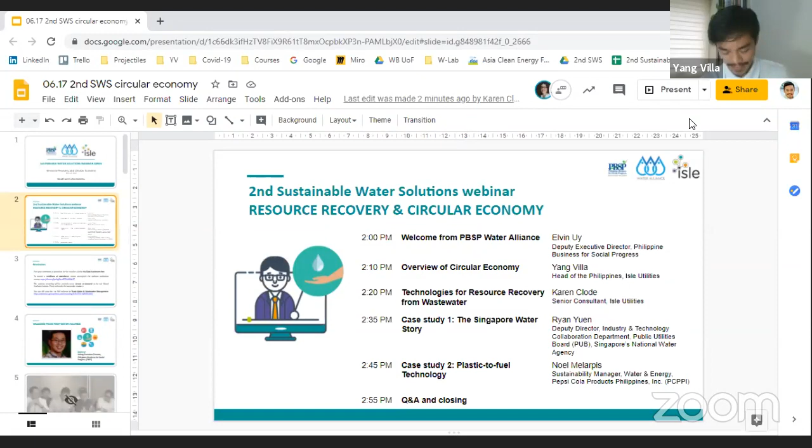Very good. And we've got a lineup of very knowledgeable speakers about this subject. And our agenda for this afternoon is, first we'll hear from one of our partners in delivering this webinar series from PBSP Water Alliance. And then I will be talking about an overview of the circular economy and resource recovery. And then we'll hear from Karen on the technology solutions for making these happen. And then we have two exciting case studies, one from Singapore and one from the Philippines, on resource recovery and circular economy. And finally, we'll have Q&A and closing.

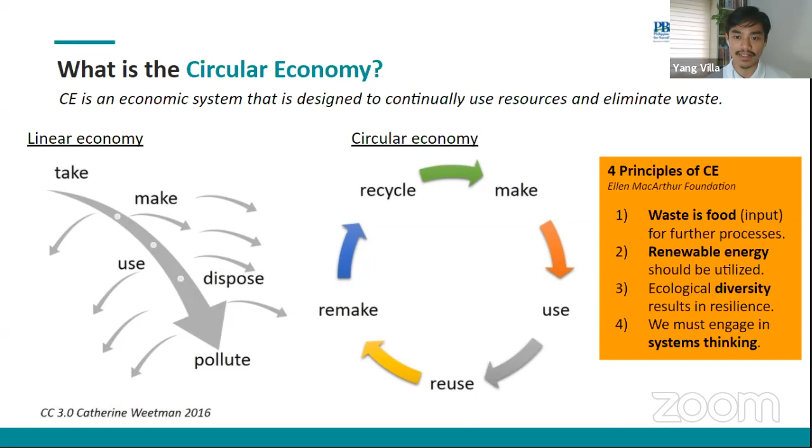And finally, to be able to do this, we must engage in systemic level thinking and not just act in silos. And I think the PUB Singapore example is a great case study of showing how to do this in a national scale. So the key message of the circular economy is that there's no such thing as waste. Anytime you see waste, it is really just unrealized inputs and unconverted value. And it's our job to figure out how to unlock and uncover that value.

So this butterfly diagram is from the Ellen MacArthur Foundation. I'm not going to discuss it in detail. You can learn more about it from their website. But I want to focus on the left-hand side of this diagram. So the left-hand side is concerned with the biosphere, or the organic cycle, and the right-hand side is more concerned with the technical cycle, the inorganic gadgets and stuff and materials that we use.

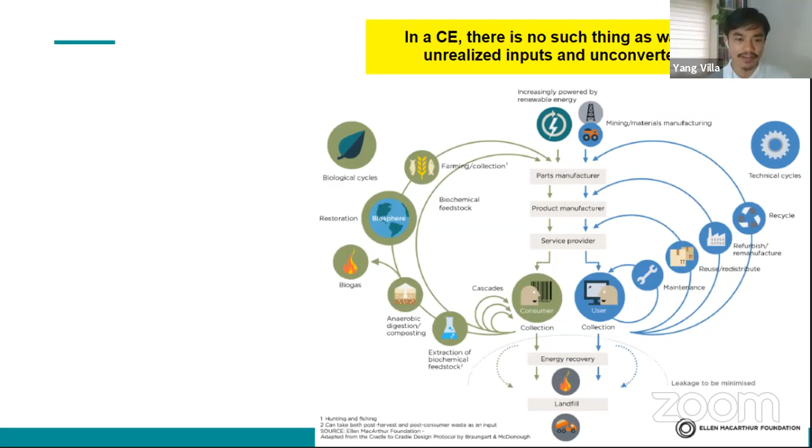The water sector and obviously the wastewater stream really contributes to the left-hand side in making sure that we recover and recycle the resources in the biosphere. And we can do that through a lot of processes. The left-hand side of this diagram will also show you the interconnectedness of water, energy, and food in what we call the nexus. And a lot of the resources that we generate out of wastewater streams can actually be reused for food production and for energy production, as we'll see in our case studies today.

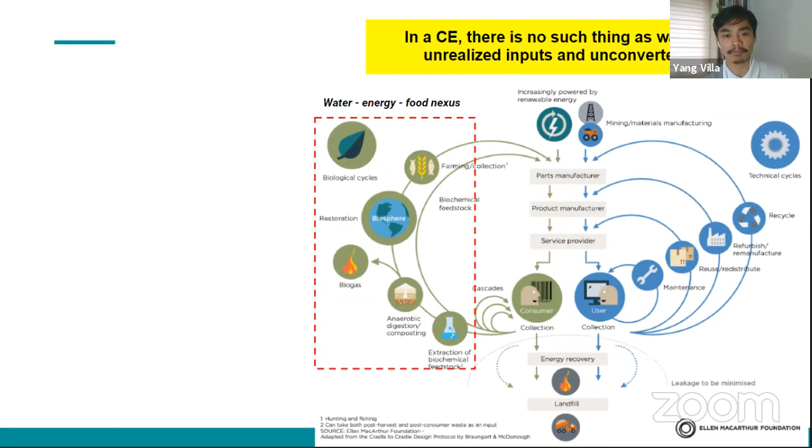So in the context of the water sector, the baseline for resource recovery and generating the circular economy is really wastewater collection and treatment. Not all the time, but for a larger scale of circular economy transitions, we do need wastewater treatment. And unfortunately, in the Philippines, this is not yet the case, because we have a great deal of cities and municipalities still not engaged in wastewater collection and treatment. We need to do better in doing that.

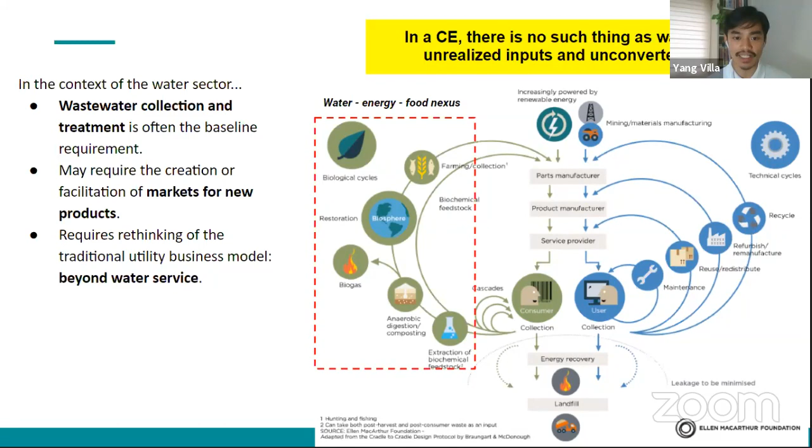The second point that we want to make across is that the circular economy may require us to create or facilitate new markets for products that are generated out of this new cycle. Let me just mention some of these new products that we can derive from sludge. And Karen later will talk to you in greater detail about this. But it includes biosolids, fertilizers, for example, biogas, phosphorus, nitrogen, and other precious resources and precious metals, cellulose, bioplastics, construction materials, and proteins, all of which can be reused into further industrial processes.

Now, to be able for us to move from a linear to a circular economy, it often requires us to rethink not just the way we operate as a business, but the entire economic system. And this means that utilities have to move beyond the traditional business model and look at things beyond water service. And again, we'll hear from one of our speakers later how the PUB in Singapore is leading in this charge.

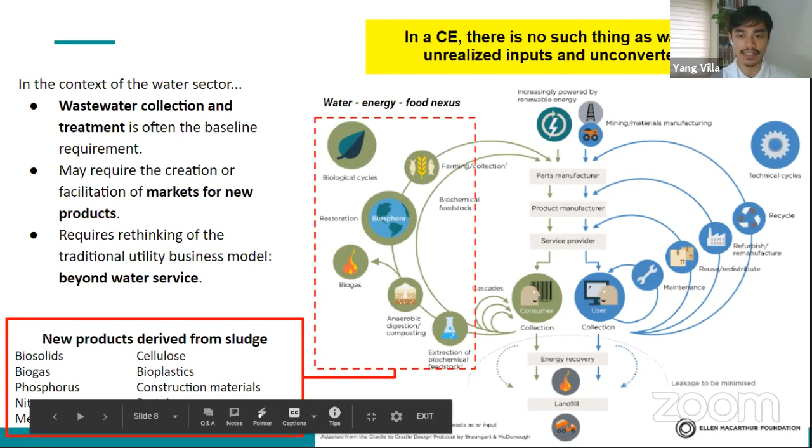So what are some of the opportunities, drivers, barriers, and enablers for circular economy? The drivers, as Elvin mentioned, could be environmental pressure, the fact that we need to recover more resources, given that they're scarce, and this is particularly useful for precious metals, for example, in the mining effluents, or even for water, especially for water scarce areas.

Another driver could be financial returns. Many utilities can actually uncover value from the circular economy. And sometimes we have social and customer pressure because our customers are demanding us to be more ecologically friendly, to have more sustainability in our business practices. And you'll hear from Noel later on about how Pepsi is leading in that regard.

But of course, for every driver, there are barriers to circular economy, including sunk infrastructure. Sometimes it's very difficult for utilities to invest in new infrastructure when our current infrastructure is still in place, and we cannot justify an expansion of the infrastructure landscape, or it will take time for returns to be recovered. Sometimes limited skills and capability are also a barrier in that we don't really know how to do this. We don't have enough engineers and scientists to make these processes happen in our company.

But perhaps the biggest barrier to resource recovery and the circular economy is the fact that we have cheap energy. Cheap energy is the primary reason for the linear economy. And until we can get renewable energy to actually be at par, if not cheaper and more economical than our current sources of energy, then it will be very difficult to transition into circularity.

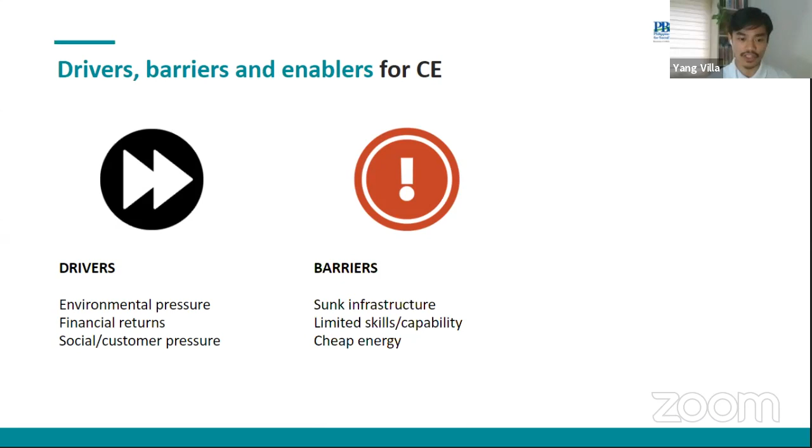But there are enablers for us to move from linear to circular economy. Number one is that governments can push for progressive legislation. We've seen this in places like Australia, for example, that they require utilities to recover some of these precious resources and materials from wastewater effluents. The other enabler, of course, is innovative technologies, which Karen will talk about later. And finally, we need to keep looking for new ways to do business and to fund circular economy and resource recovery projects to move forward with this new way of production and consumption. So that is a very quick overview of the circular economy.

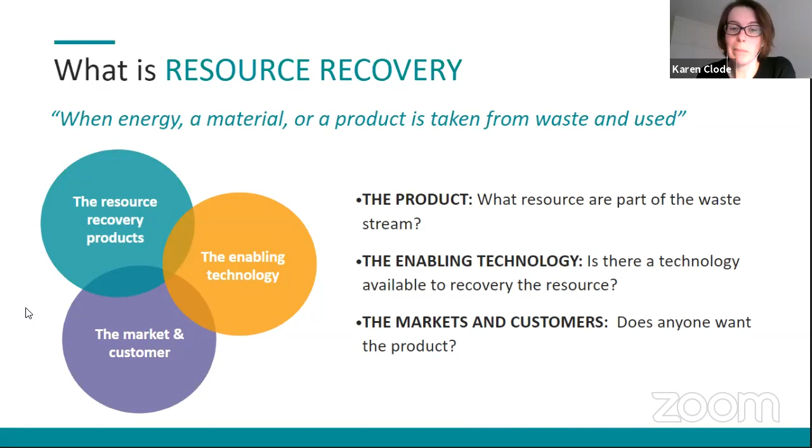So the physical product itself: what form is it in the waste stream? Have you got it and is it easy to get to? Selecting then the right technology to manufacture the product, so actually getting it from the form you have into a form that's commercially viable. And then having a market, so having somebody you can actually sell that product to. Equally, it might be an internal reuse market within your manufacturing company or your business, or it might be somebody external.

So in terms of resource recovery potential, there are basically three elements that have to converge. And you have to ask yourself about quantity. You might have all those three areas, and then you ask yourself, can you concentrate up that waste in the waste stream? Do you have enough to extract it and make it viable? Is the cost of that technology to actually concentrate it up more than the market value? So you have to take into account stuff like transportation costs as well.

This will be different for all companies, and it'll differ within a company. It may even differ from site to site depending on what you're producing. As Yang said, we've undertaken a number of different projects in this space, evaluating waste minimization and resource recovery opportunities for various different businesses. So if you want more information on that, just feel free to reach out.

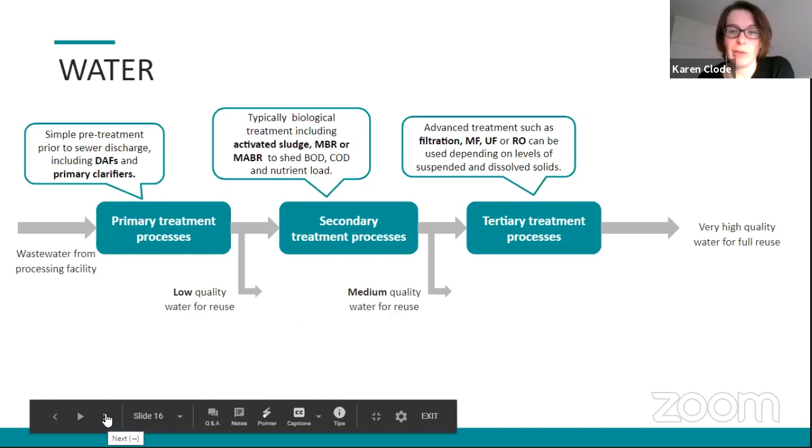So an example of a secondary process here is the Clean TeQ Water process BIOCLENS. They have a treatment process which is basically bacteria encapsulated in what they call lenses, so tiny plastic capsules basically. The advantage of this type of process in wastewater treatment is it guarantees a good water quality.

The biocatalyst ensures that your biological process remains stable and you don't get washouts, because with trade waste you might get very high fluctuations in that treatment process. These bio lenses make sure that your bacteria is kept within that process, because the bacteria can be encapsulated within those lenses. So those sort of processes will give you a slight step up, and a more robust secondary treatment process to ensure you're getting that good quality water.

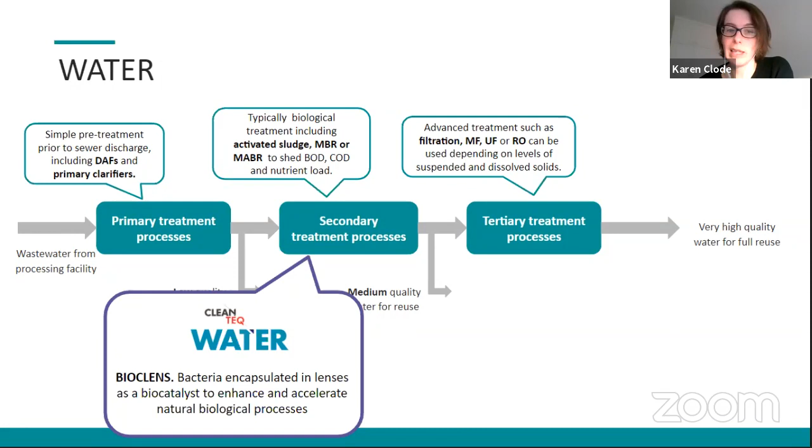Tertiary processes such as ultrafiltration and reverse osmosis will be your next step. So you'll be looking at producing an ultra pure water that's suitable for complete reuse, equivalent to what you'd get from your local municipality. Advances in membrane and waste treatment systems have led to some manufacturing sites actually reaching complete zero liquid discharge.

An example I've got here is the PolyCera from Water Planet. They've developed a material that's not quite like other polymers. It's not quite like metal or ceramic, hence the PolyCera name. So it's a much more robust polymer membrane compared to a standard one. If you have issues with pH, temperature, that sort of thing, they'll stand up to that type of treatment.

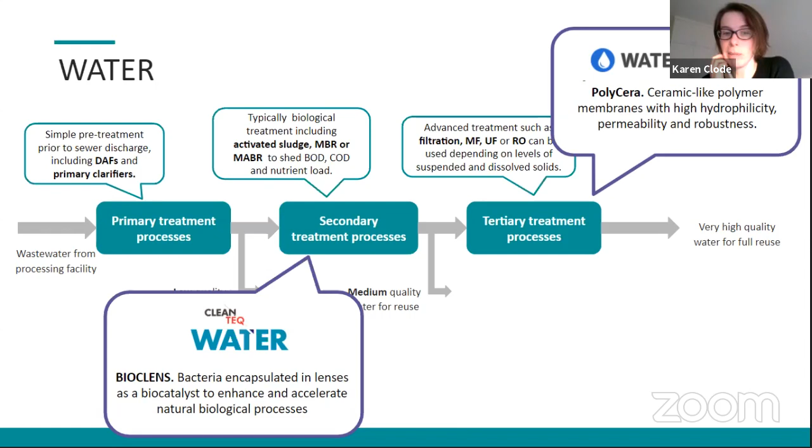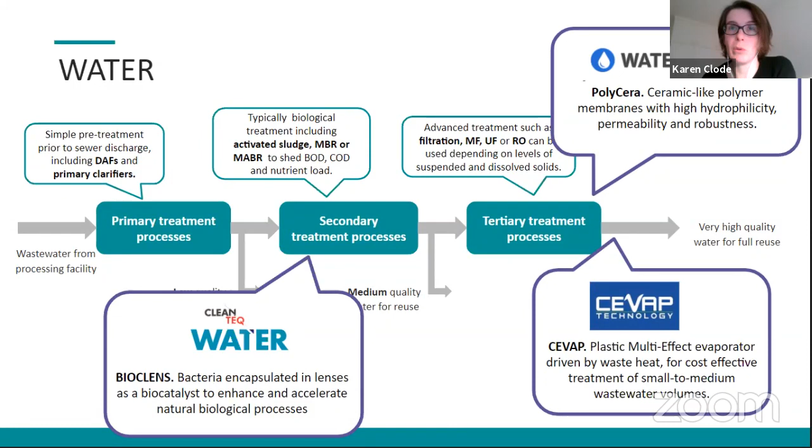If you are putting in membrane treatment, you'll obviously get a reject, so you might want to reduce the volume of that reject stream. An example of technology to help you get to zero liquid discharge is the CEVAP. The CEVAP technology is a low cost evaporation process. It enables the recovery of clean water as well as valuable materials. Once you've concentrated up that water, you can then recover those materials, which may be metals, or salts, or something of that kind.

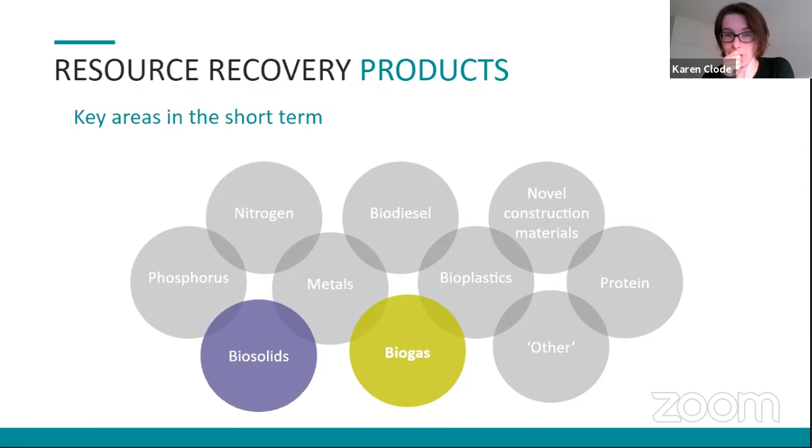So other than water recycling, biosolids and biogas tend to be the current largest resources recovered in wastewater treatment these days. And actually biogas is seeing the greatest growth, probably driven by electricity prices. So let's cover biosolids first.

Biosolids to land is a well-developed market, and in some areas there's no real driver for improving the quality of your biosolids. It may be other drivers such as transport costs dictating, or maybe you've lost your route to market, your route to farmers, to land. Maybe you've got some sort of contaminant in there, or maybe you want to produce something with a higher commercial value, or something drier.

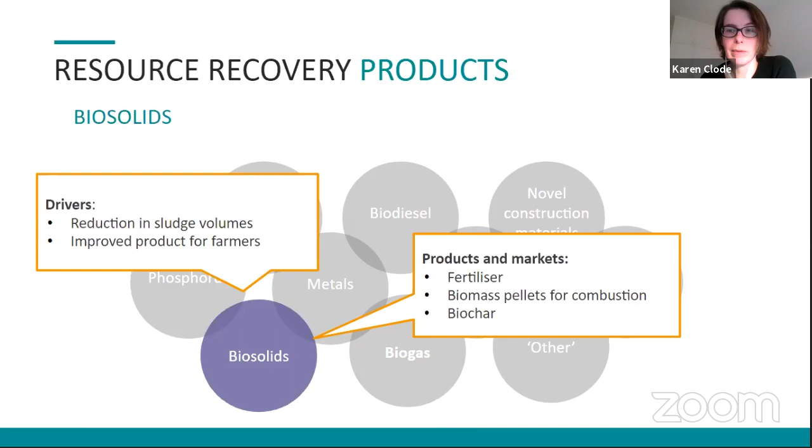So if we have a look at biosolids in a bit more detail, typically biosolids might be coming from various stages of treatment processes, or just from a solid liquid waste byproduct from a manufacturing process. They tend to all be combined together. If you are looking for an alternative product rather than just putting that liquid sludge to land, you might be looking to dry it or produce a biochar or a fuel from those biosolids. So these are a couple of options.

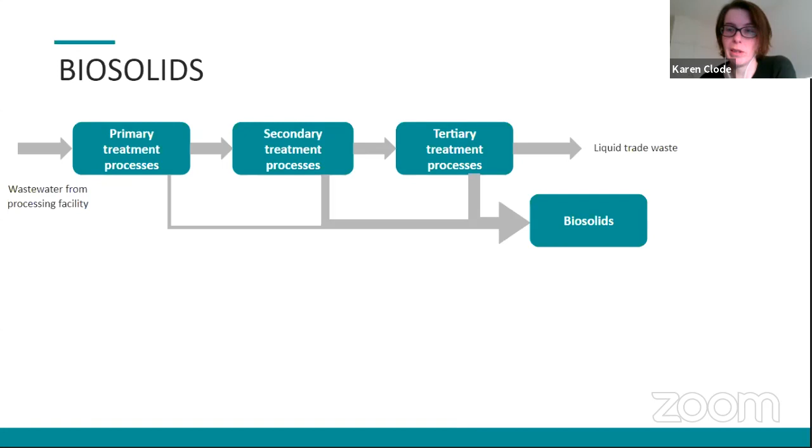So if we move on just a little bit, a couple of clicks, next.

So there's two technologies here. If you dewater and want to reduce the water content of that sludge further, you may be looking at the EnerPel process from Moxiepel. This is a new one on the market, and it's quite exciting. It's a self-desiccating pelletization process. They have a drum pelletization, but it doesn't use heat, so it's interesting on that front.

And then there's the Terra Nova hydrothermal carbonization. This is the other end. These guys are using heat, pressure, and chemicals, but they have an interesting recycling process that actually makes it quite efficient.

So the EnerPel process will produce a pellet from the sludge, whereas the Terra Nova hydrothermal carbonization process will actually modify the sludge and produce a coal-like material. So both of these can be applied to land as an advanced fertilizer product, so drier, obviously concentrated NP, or they can actually be used as a fuel.

So they could be used in maybe a modified power station or in a cement kiln or that sort of stage. So there's some options here for taking your sludge, though I will say that the use as a fuel will depend on the calorific value, so how much carbon you have in there. So if you have a manufacturing process that's producing a sludge with a very low carbon content, these sort of processes might not actually work. But there are other ones in our long list, but I'm not going to touch on them now.

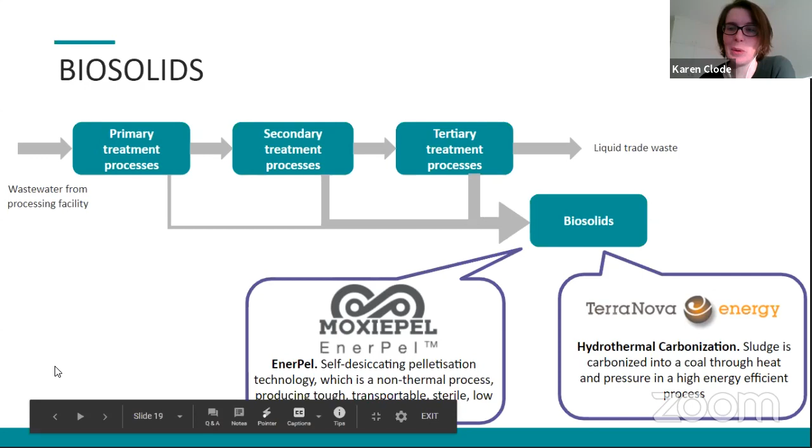So if we move on to biogas, like I said, this is also a well-developed market, and there's many drivers around this. I think a lot of people are trying to get away from the reliance, perhaps, on the grid. If you've got an unreliable power source, maybe you want to be able to buffer it with your own power. You also may want to reduce your greenhouse gas emissions or get an income from generating electricity that goes into the grid.

Typically, it is electricity and then heat and steam that you're producing from that biogas. It can actually be upgraded and injected into the natural gas grid, if you have one you're open to, or it can even be converted into hydrogen if that's a scheme that's happening in your area.

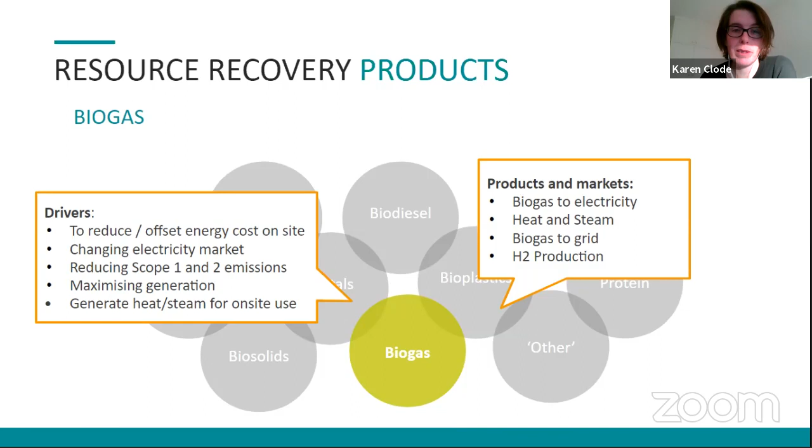Moving on to having a look at biogas in a little bit more detail. It's typically produced from the sludge generated in various wastewater treatment processes. It tends to be done at the end of the treatment processes. There's a bit of development here in anaerobic processes. So if you just click again, please, Yuen.

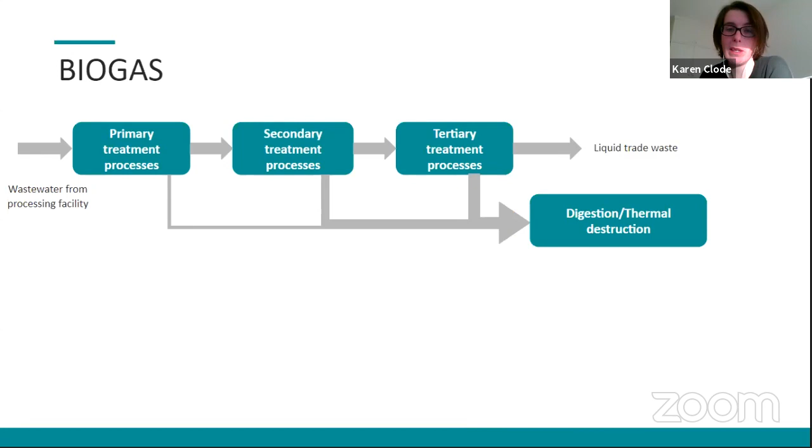So the anaerobic processes are being developed at the moment, and the anaerobic MBR is a good example of this development. It's been around for a while, but it's a bit more difficult to operate correctly. It doesn't produce the same amount of biogas as you'd expect from anaerobic digestion, but it does produce a high quality effluent in a single step. Evoqua is one example of the companies that have developed a robust process. So the ADI technology is out there, and they've deployed it in a number of different applications around the world.

So it's proven. But if you have a wastewater treatment process producing biosolids already, so you have a solid or sludge waste, it might be better for you to have anaerobic digestion. So this might come in a large scale, maybe a tank, or a lot of times it can be a lagoon, but it may also be on the small scale. So if you're a small scale food manufacturer, or even just a restaurant, you might be looking at some sort of containerized system potentially.

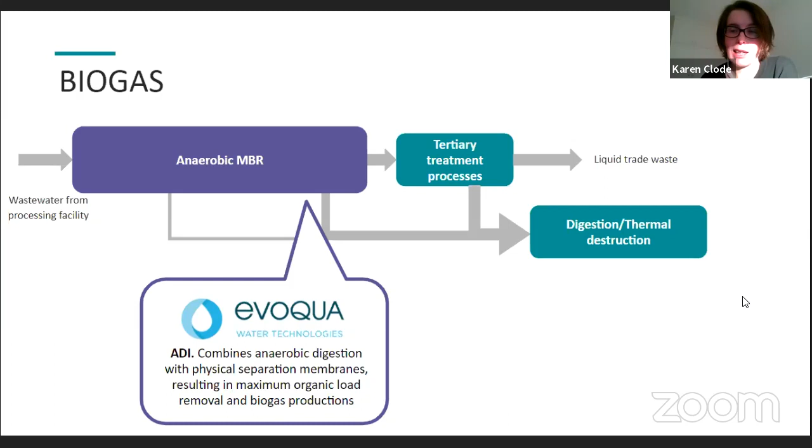So if you click, the SEAB Energy FlexiBuster system is a small scale containerized system. They'll take food waste generally, but they'll take any sort of organic waste, and they'll produce a small amount of heat, energy, and then of course a fertilizer product out the back end. So there's a wide range in that digestion area. You don't have to have a lot of sludge to put a large scale system in place. There's lots of options.

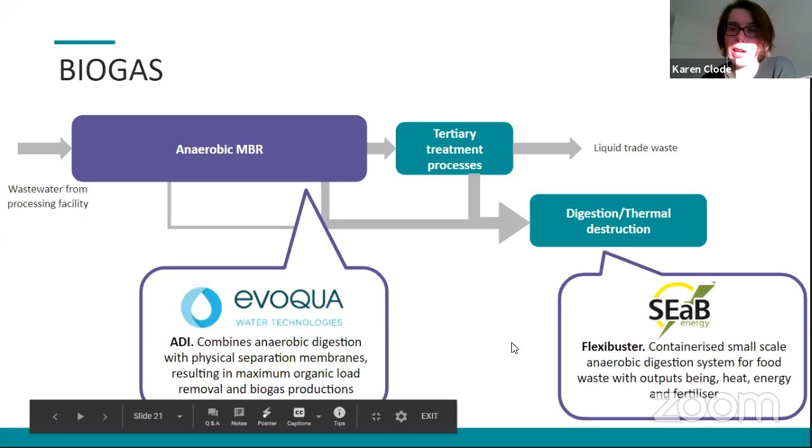Finally, though, there's a last option here. Maybe disposal is an issue, you've got nowhere to put it, landfill costs are high, or maybe you're looking at maximizing your biogas production, trying to recover as much biogas as possible from your organic stream. Then you might be looking at a thermal destruction process. So Anergy is an example of this.

They're high temperature pyrolysis, and they convert the organic material into a syngas and a biochar. So the biochar can be used for various different applications. It can be burnt, or it can be used as a soil improver or fertilizer, but you'll produce a higher amount of biogas from that process.

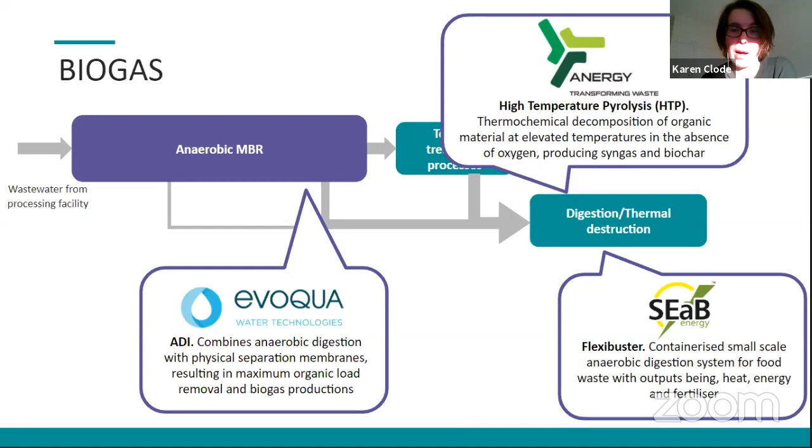So again, I know that there are a number of drivers here around nitrogen and phosphorus, mainly being around changes in discharge limits. So that's leading to a more intensive look at what treatment processes might be available, and the consequence of having more intensive treatment processes to get rid of your N and P is you're going to have greater quantities of sludge, and that's typically where your nitrogen and phosphorus is going to end up. So I know this is going to be a growing area for a lot of companies in their trade waste.

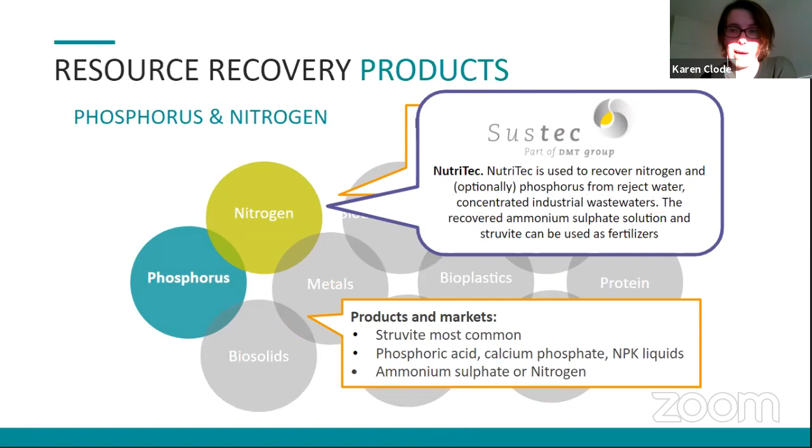Alternatively, the ClearAS technology can remove nitrogen and phosphorus from the wastewater stream itself. So I quite like this one. This is an advanced biological nutrient removal process. Basically it's a vertical algae treatment process. They use clear perspex tubes, so they don't have issues with footprint. They can use LEDs if light is an issue to ensure that the algae grows, and then they have a specially designed microfiltration process that can separate the algae from the water and produce a higher quality water.

So this is a good option if you still have N and P issues at the back end of your treatment plant and you want to recover them. That algae then has numerous options. You can dry it, you can put it into a digester, you can produce a fertilizer out of it. So yeah, N and P, a big one. So if we can move on to metals.

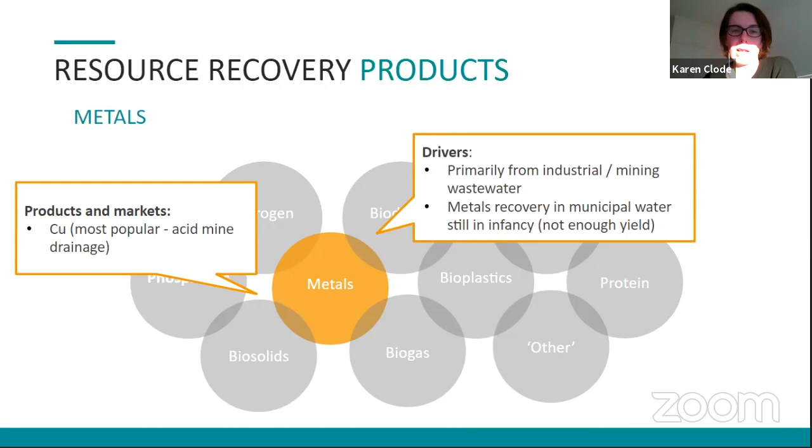Metal recovery tends to be very specific to certain industries. So electroplating, mining sectors, those are the sort of industries where these technologies are actually developed out of. And so therefore they're mainly applicable for wastewaters with high metal concentrations. The most popular metal is actually copper. So that's the one that most technologies can recover. It tends to be associated with acid mine drainage.

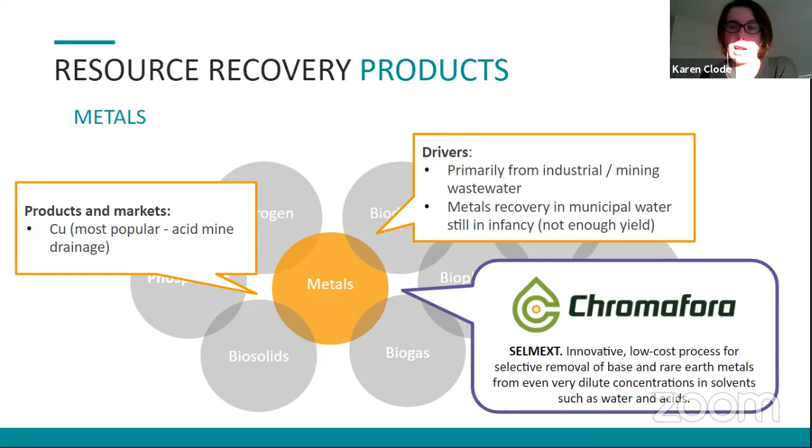They are starting to be able to recover metals in lower concentrations. So perhaps if you have more precious metals, lithium is an example, anything that's one of those more rare earth metals being used in batteries, they tend to be more in favour when it comes to removing from wastewater. So Chromafora is actually a good example. They're a great tech, a low-cost solution. They use phosphine ligands, and they recycle the phosphine ligands, I think, which makes them unique and means it's a lower cost process than some of the other recovery technologies for metals.

Some companies I've seen can take a very high free fatty acids content. So basically they can handle a much dirtier oil. So it doesn't have to be quite a clean oil from a deep fat fryer, as it were.

They can take stuff from like steel rolling oils. Another area is bioplastics. So obviously we're all keen to replace our petroleum-based polymers with biopolymers. So there is a way to produce PHAs from sludge. So you can grow bacteria that will produce PHAs, and then you can harvest it. It has been developed in early stages, and it has high profitability predicted, but it's still quite a delicate process, and so it's kind of still in development.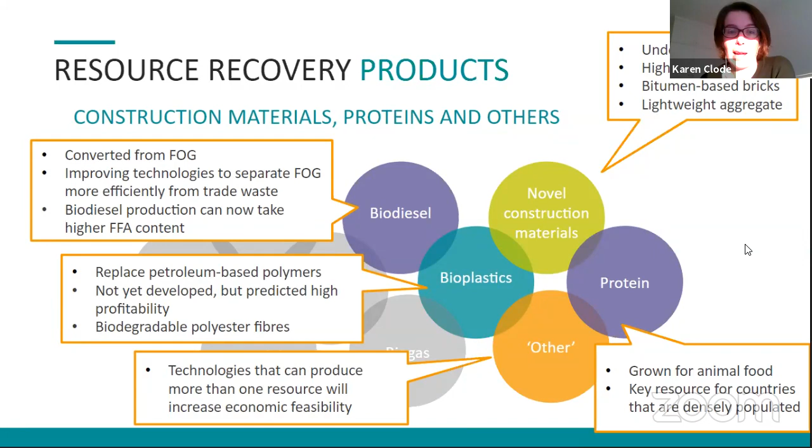And there's other ones as well. So around there's obviously carbon capture, hydrogen generation. So these sort of technologies are all also on the horizon and being looked at, but they're not exactly economically feasible at the moment. So just to summarize, the market basically is key. So that drives your technology development. And so the biggest market basically is for water at the moment.

So clean water is key for everyone. It's key for manufacturing. It's key for people's lives. And so there's a clear and obvious driver here to recover water wherever possible. There also might be drivers around just wanting to have a reliable water source, or ensuring that you've always got water for your manufacturing process, because I know that can be a showstopper if you're having issues. After that, biogas and biosolids are kind of the key ones that are being used by a lot of companies at the moment.

The drive to generate biogas will drive sort of drying or enhanced digestion processes and other treatment processes like anaerobic MBR, especially where land is restricted and there's no disposal of those biosolids. So they may even drive sludge destruction technologies. Sludge destruction technologies could be coupled with other waste streams, so maybe plastics or other packaging waste that you have. So it could ultimately mean that you could mix in your biosolids with those other wastes to produce biogas. So this biosolid side again, there may be a drive.

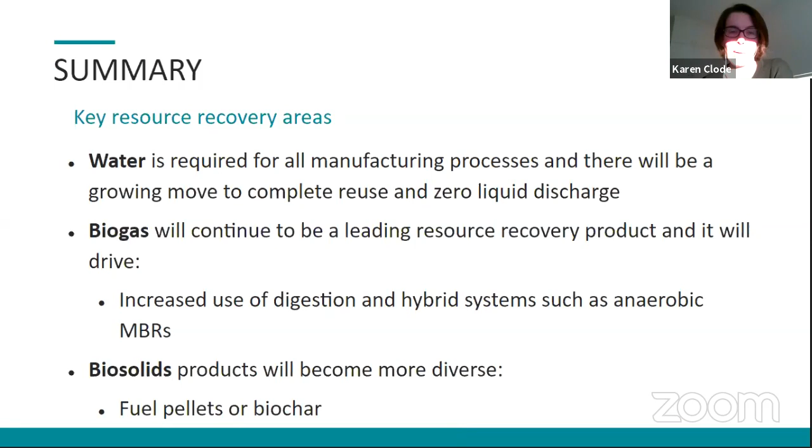Thanks, Jane. Thanks, everyone. Thanks a lot, Karen. That was what we call a technology flash. We try to present in as little time as possible the many technology options available for companies. And again, it should be fit for purpose: what is most appropriate for the kind of production that the end user has, and what opportunities are derived out of that. Right. Definitely. Thanks a lot, Karen.

Let's dive into our first case study, which is the Singapore water story. I'd like to invite Ryan Yuen, the Deputy Director, Industry and Technology Collaboration Department of Public Utilities Board, the National Water Agency of Singapore. Ryan? Thanks, Yang, and good afternoon, everybody. So this afternoon, I will give a brief overview of our experience in circular resource management and resource recovery efforts. So, Yang, will you be controlling my slides?

Can I have the next slide, please? Yang, can you hear me? So you're probably not seeing this in presentation mode, so I'll have to keep it like this if that's okay. Okay, fine. Then I'll just go on to the next one. Okay, go ahead. Yep, sorry for the delay.

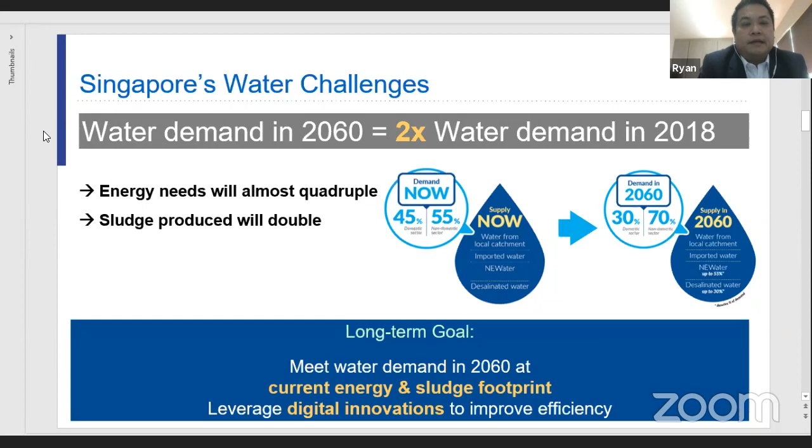So from a longer term strategic point of view, business as usual, with the same current mode of operation, is probably unsustainable. And how do we meet this water demand? Our internal long-term goal is to meet this demand while keeping to the same energy footprint and also the sludge footprint. So in terms of how we tackle this issue of resource recovery, to simplify it, it is about closing the loop. So I would like to explain our strategy in terms of closing 3 loops: the closing of the water loop, closing of the energy loop, and the closing of the nutrients loop. So next slide.

So I think most people will be familiar with the water loop. The typical water loop is highlighted in blue, where rain falls and then we collect the water that comes from rain. It goes into collection bodies like reservoirs that are used to supply drinking water to domestic users and industries. And thereafter it's collected back and treated. So in Singapore, 100% of the population is served with drinking water, and almost 100% are also provided with modern sanitation. And I think that is key.

The fact that it's 100% sewered and all our wastewater is collected allows us to close the water loop, because really the concept here is about a circular loop. And the only way to have a circular loop is to be able to collect every drop that's being used, treat it and reuse it. So in Singapore's case, we invested in the early days in the sewer sanitation system, and that allows us to now introduce what is known as NEWater, or high-grade reclaimed water, as an additional source of supply. And this source of supply goes mostly to our industries.

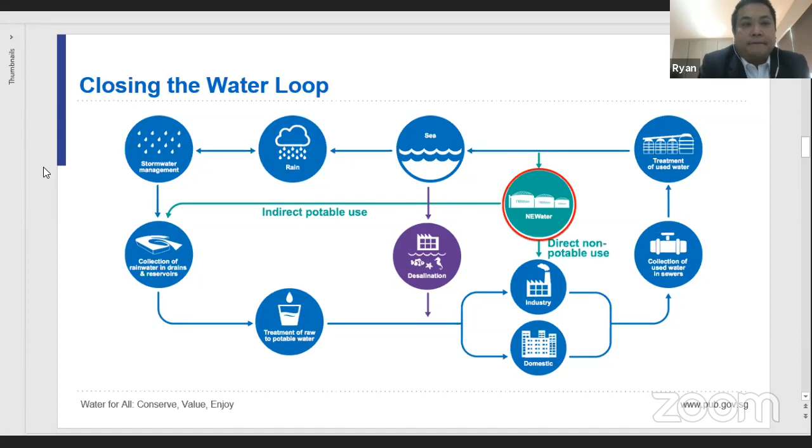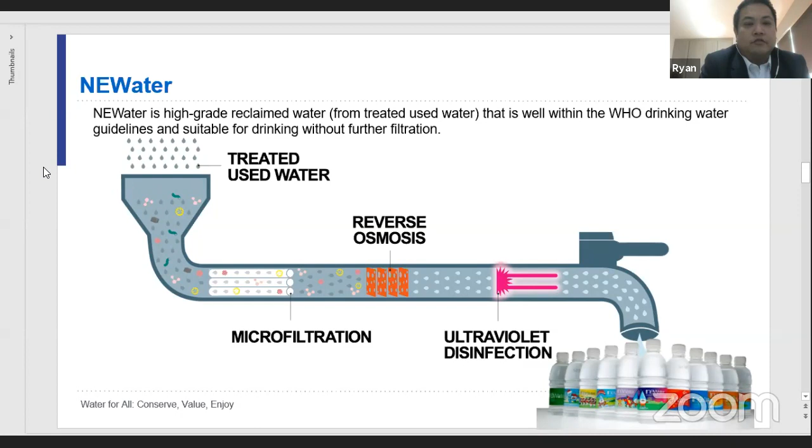So what is NEWater? Actually, NEWater is just reclaimed water. I think Karen mentioned briefly some of the technologies that can be applied. In Singapore's case, we decided to put in a multi-barrier process including microfiltration, RO, and UV disinfection, simply because we decided that the reclaimed water should be of as high a grade as possible. But the concept here is to be fit for purpose. If you're using it for other purposes that don't require such high grade water, then it depends on what technologies you put in. But in Singapore's case, because we intended it to be an additional source of supply for industries and homes, we put in this multi-barrier technology to achieve a higher grade water. Next.

So NEWater then forms one additional source of water supply. As you can see from here, we actually do have 4 sources of supply. The rightmost 2 taps are actually from natural sources. The rightmost one is basically the water that we collect from the rain. The second from the right is water that we buy from neighboring Malaysia. But again, this comes from natural sources like rain.

The left 2 taps are what are known as drought resilient taps, which are taps that would not run dry in the event of extreme weather events, be it floods or droughts. And that will be how we build the resilience, and in effect, that is really the solution for us to close the water loop to ensure that there's water sustainability. So NEWater is what I just mentioned earlier. The other one is desalination, which everybody knows is about desalting water from the sea.

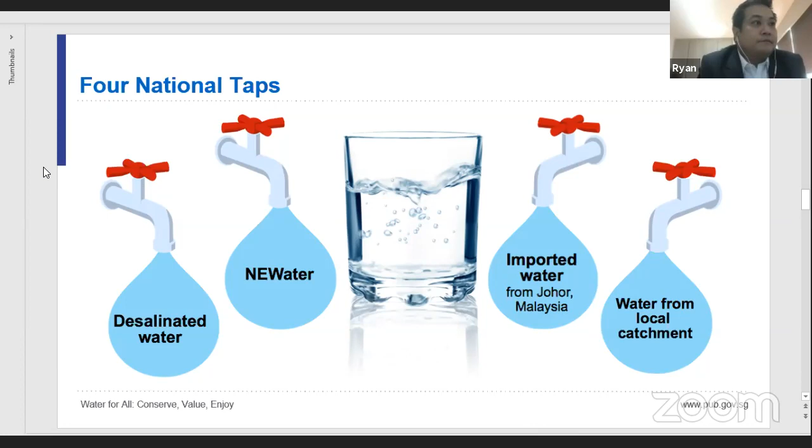Next. So desalination, as you all know, is energy intensive. As I mentioned to you earlier on as well, a lot of the processes involved in supplying water and treating wastewater are also energy intensive. So as a small country, in terms of closing the energy loop, we are also putting a lot of effort here.

And this is one example that we are currently in the process of building, which is called the Tuas Nexus. And the concept here is to bring together a wastewater treatment plant, we call it the Tuas Water Reclamation Plant, and locate it side by side with a waste management facility or waste-to-energy facility, or in layman's terms an incineration facility.

And really the idea here, as I mentioned just now, is because we sit within the ministry, and the ministry oversees both the waste agency as well as the water agency. So because of that synergy at the ministry level, we are able to plan and co-locate these 2 new facilities side by side and reap the synergies. And the intention is eventually, with the co-location, for the water reclamation plant to be energy self-sufficient.

So what it means is that the liquid waste stream from the waste management facility, plus the power that is generated from the steam, could then be used to power the operations of the wastewater treatment plant, and vice versa, the dewatered sludge, biogas, and a lot of the solid waste that comes out of the wastewater treatment processes can then be supplied into the waste management facility, again to use it as a resource to generate electricity and energy.

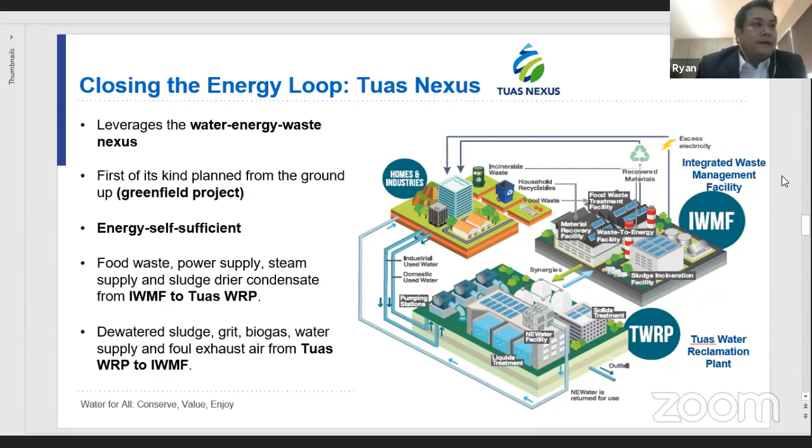And I can't reiterate enough that we are able to do all this simply because we have a modern wastewater collection system known as the Deep Tunnel Sewerage System. I understand in the Philippines there are certain parts that are sewered, and there are also many areas that are on septic tanks, and every country has its own unique circumstances. But for us, the fact that we're able to collect every drop of wastewater allows us to develop some of these capabilities.

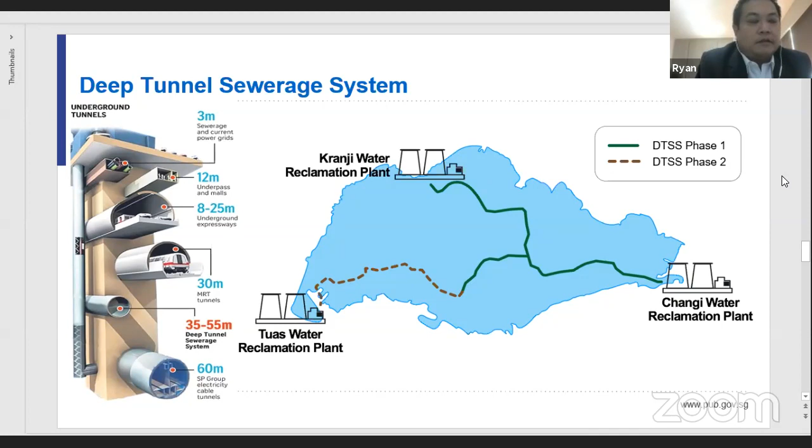Next. Besides the Tuas Nexus, one of the interesting things that we have recently embarked on is, we have about 14 reservoirs located all over Singapore, supplying water that is from rainfall. And these reservoirs are just sitting there most of the time, just collecting rainwater.

And so what we have done recently, implemented over the last 1 or 2 years, is building floating solar panel systems on our reservoirs, because the reservoirs are large surface areas and most of the time they are unused. And that helps to generate enough energy to support the operations of the reservoir, as well as supplying additional energy back to our energy grid.

And then finally, I guess we are always in search of additional ways where we can reduce energy dependency. I have told you earlier, desalination is one of our sources of supply. So how can we reduce the energy consumption from desalination is also key. And a lot of efforts in terms of R&D are being put into researching and developing alternative solutions for achieving low energy desalination.

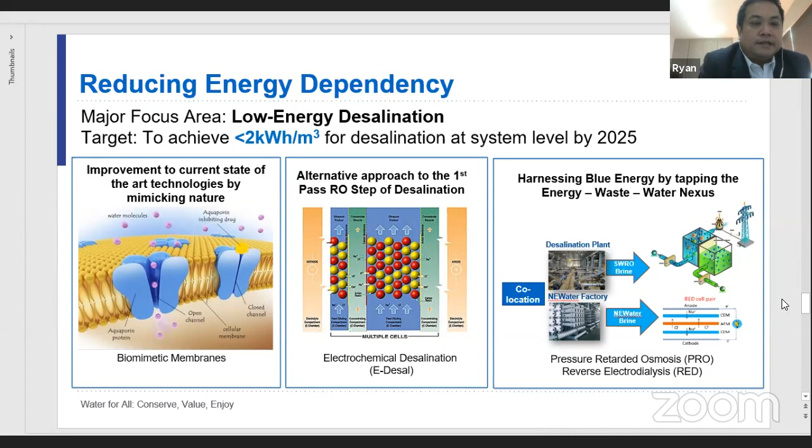Next. And this is actually, before I come to my end, probably one of the last slides. So I think early on, Karen spoke as well about the biosolids and the biogases that are generated, and these are precious resources that should be recovered and reused. And I agree with that. In Singapore's case, land is scarce, right? We are only an island state. We only have about 700 square kilometers of land, which is really, really small. And so we are going to run out of dumping ground.

So any way that we can use to reduce the waste that goes into our dumping facilities would help. So in this case, we are looking at how do we use R&D to reduce sludge, as well as to recover some of the nutrients that are still present within the sludge. I understand that because of time, I don't actually have the luxury of going deep into some of these issues.

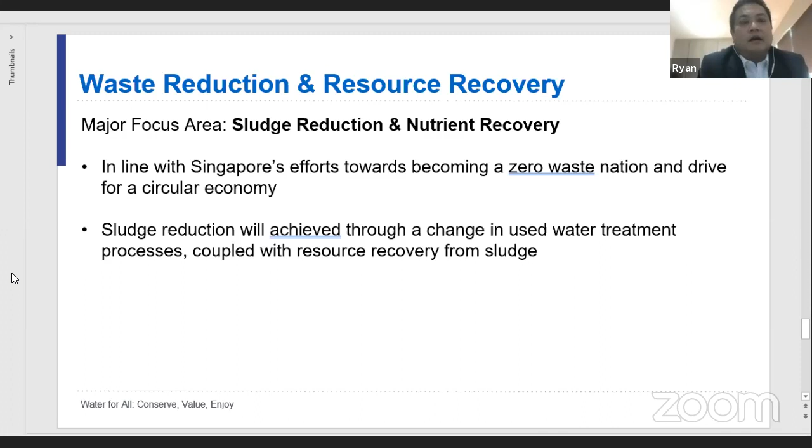We are also using the opportunities during COVID to introduce a few webinars. So coincidentally, when I got invited by Yang to speak, we were also planning a webinar on circular economy and resource resilience, moving from linear to circular resource. And that would happen next month on the 7th of July.

And you'll be happy to note that we do have a speaker from the Philippines in the panel, Mr. Jose Rene Almendras, the President and CEO of Manila Water. And other panelists will include my Chief Engineering and Technology Officer, Dr. Pang, as well as Diane, who is the CEO of Portland, Oregon Clean Water Services.

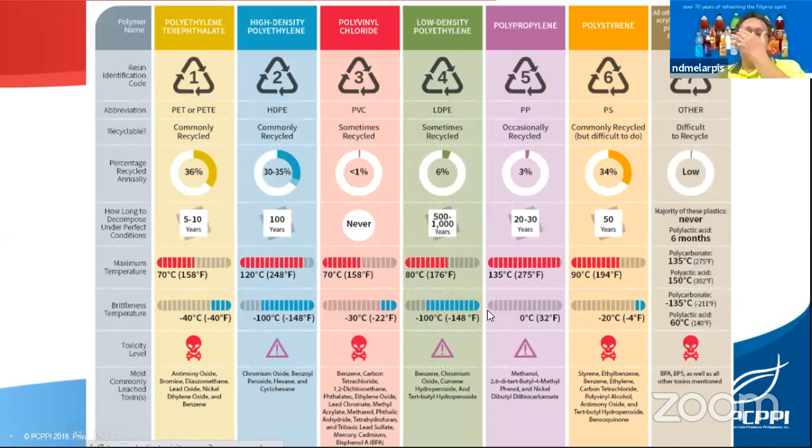So as I mentioned, there are 7 types of plastic. For Pepsi Cola, we are producing more on the PET. Most of the plastic that we recover is only type 1 and type 2, which is PET and high density polyethylene. These are the plastic packaging. If you look at the toxicity level for PET, it's toxic. The best to recover is HDPE. In the recycling plant, this is the most expensive.

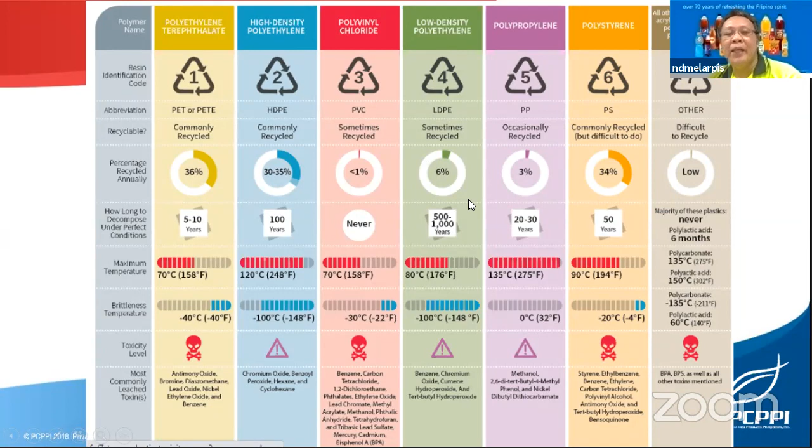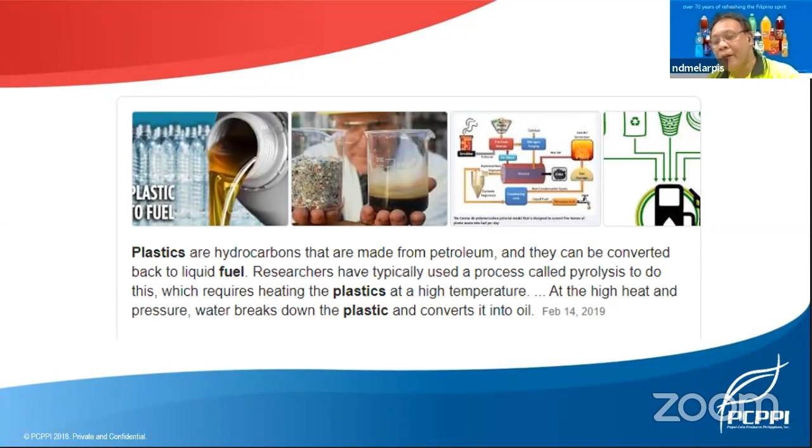And now they are trying to use LDPE, so now this is making money in the recycling plant. Plastic is made from petroleum, so we will make the plastic waste into petroleum product. Fortunately for us in the Philippines, we have one inventor named Jaime Navarro. I don't know if you read about him on the internet. He invented the process to make fuel from plastic, and he made several plants here in the Philippines. Unfortunately, we are trying to connect with him, but we cannot locate him. Even on his website, we do not have his contact number. Even for the Polygreen Technologies company, there's no information on where to contact them.

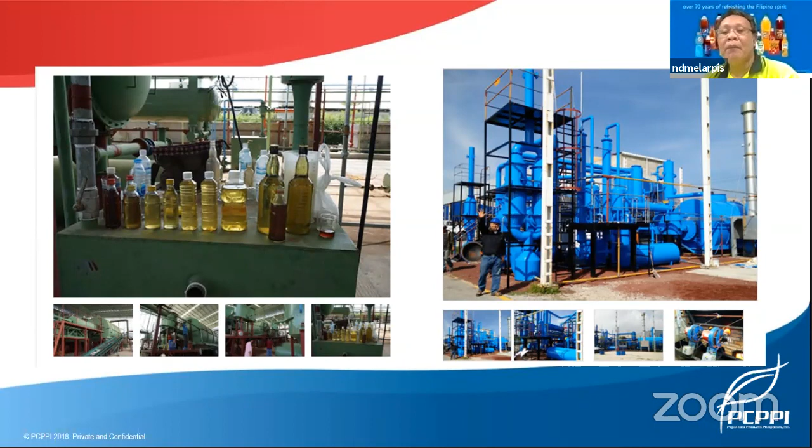So from that, we tried to look on the internet. China now also has plants. They are selling plants to convert plastic to fuel. Unfortunately for China, they are not confident in using PET as the raw material to make plastic to fuel. So we are fortunate here in the Philippines. We discovered one in Zamboanga. So this is his plant. He is now producing fuel from mixed PET and type 1 plastic. We are getting some diesel fuel from this plant, and we use it as fuel for our boiler. We mix it with the bunker fuel nowadays.

And recently, this company also sells diesel fuel to other industries like GSMI and Bounty Fresh. Just for appreciation, I want to show the video. We throw the liquid fuel on the soil, and then we start to fire it. If you notice, compared with gasoline and diesel, it will not burn on the soil. The grade of the fuel they produce is better than the gasoline product. So it is promising considering the volume of plastic that we generate, and this will also give opportunity or livelihood for our local government unit and community to collect plastic and sell it to the recycling plant.

Just to summarize, we try to minimize the use of plastic. If possible, we use RGB. Fortunately for Pepsi Cola, in our business we use mostly RGB, so less than 30% is plastic, unlike our competitors. Looking forward, like Yang mentioned earlier, with progressive legislation, we expect in the coming months or years new laws that will create financial difficulty for plastic products. So now we try to support local suppliers like Jaime Navarro by buying their products, the diesel from plastic, to use it in the industry.

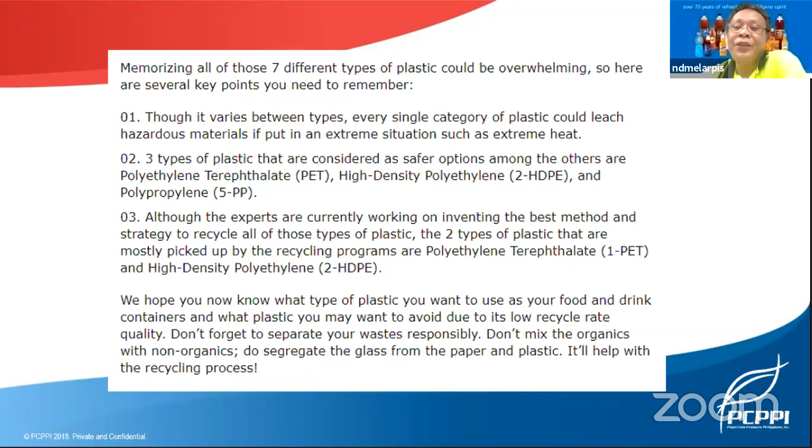As of now, we cannot use it in our vehicles, since it's a big impact for us if our engine is damaged. But boilers and generators are not sensitive to cheap fuels like bunker C. We can convert from bunker C to diesel coming from plastic fuel. So that's my presentation on plastic to fuel. Thank you very much.